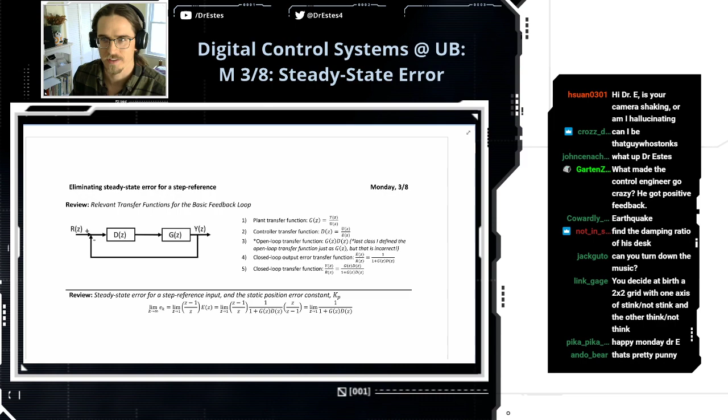Our digital controls channel is starting to develop some lore, some history. Hey, happy Monday, Pika.

All right, let's get started here. So we are going to revisit this DC motor, and we are going to make an improved controller. But we're going to walk through conceptually how we get to this point.

Happy Monday to all that do not stink. Okay, all right, where... I'm going to the wrong screen. Okay, so that's where we're going today.

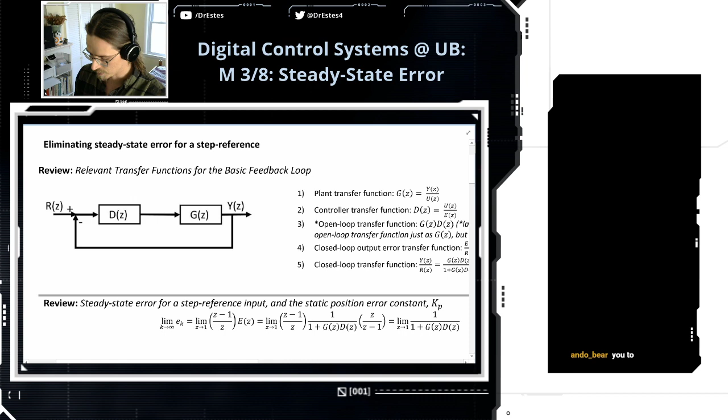Just a quick recap on what we did last time, because that was Friday, and it was a long time ago. We're introducing some basic feedback notation, so we're going to refer to this block, this transfer function G, as the plant. This is the system that we want to control. In this case, this is the DC motor.

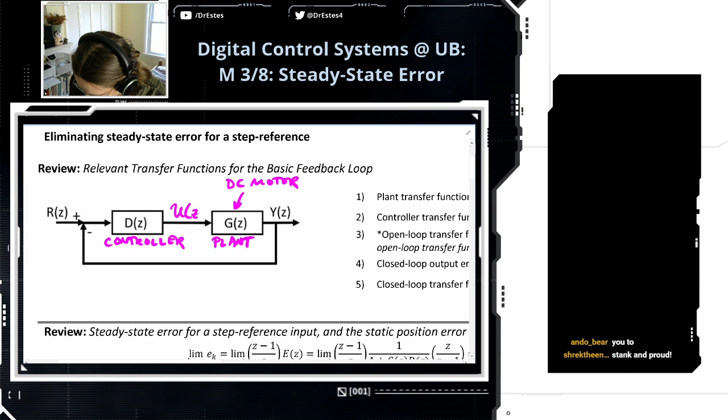D of Z is the controller. And what this amounts to, and you'll see this today, this amounts to one line of code on your microcontroller that tells us what voltage to provide to the DC motor. The signal that comes out of the controller, we typically call it U. For the DC motor, this is a voltage. And the input to the controller is the error, E.

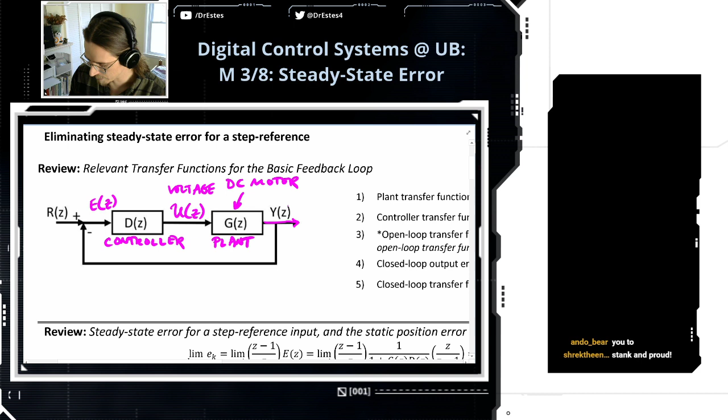And so here's where we have our feedback loop. The error is the difference between the output, and this output for our DC motor is an angular velocity, in radians per second in our case. And here is our reference angular velocity, the desired angular velocity that we want to achieve. So the error is R minus Y. The controller takes the error and it spits out a voltage which is provided to the plant. And the goal is, as with any control system, we want to closely follow the reference behavior.

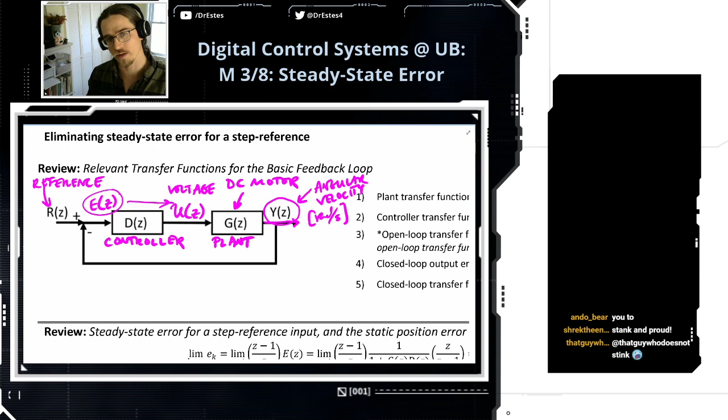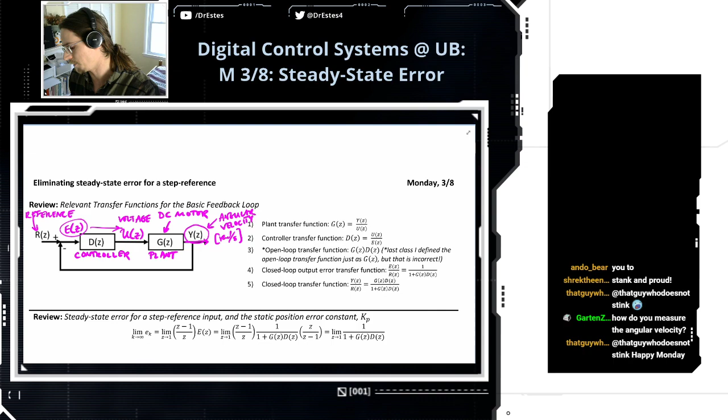So last time, we derived a bunch of transfer functions. How do you measure the angular velocity? There's a rotary encoder on here, and it's just picking up the angular position. And then I'm doing a real simple differentiation to approximate the angular velocity, so we're not using back EMF or anything like that. It's kind of a crude estimate of the angular velocity.

So our plant transfer function G of Z, this is the Z transform of the output of your plant, which is angular velocity, over the input, which is the voltage. Our controller transfer function is the ratio of the Z transform of our control input to our error signal.

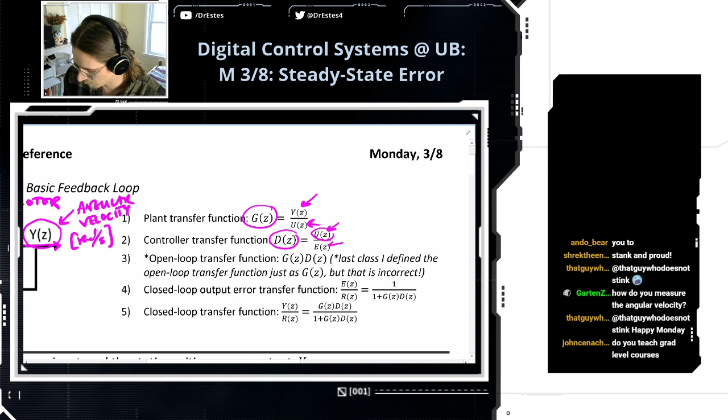Now, I put a star next to this guy. The open loop transfer function, I don't think we talked too much about this, but it's the product of G and D. So if you take your controller transfer function and you multiply it with the transfer function for the plant, that's your open loop transfer function. Because I think last class I defined the open loop transfer function just as the plant, but that's not correct.

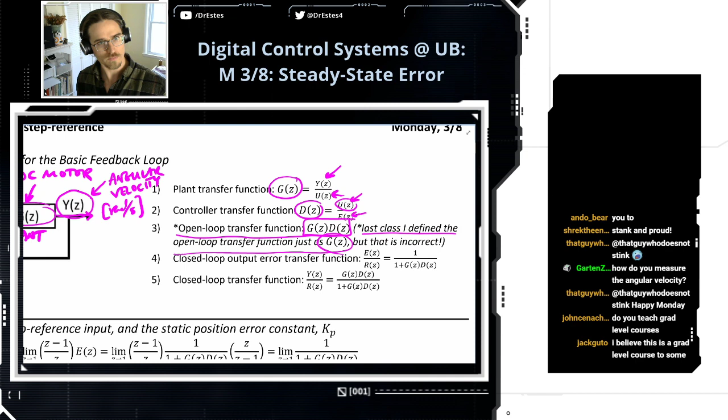John Cena says, do you teach grad level courses? Yes, well, this is a mixture of senior level students and graduate students. I think we have mechanical engineers, electrical engineers, some computer science, mostly mechanical.

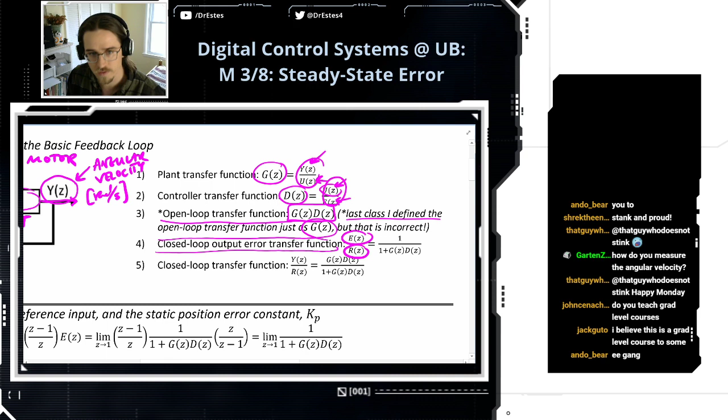Okay, the closed loop output error transfer function. So all of these transfer functions are just ratios of two quantities to each other, basically. So we have the error to the reference, that's the error transfer function.

Yeah, represent electrical engineering, aerospace engineering. And MAE for life.

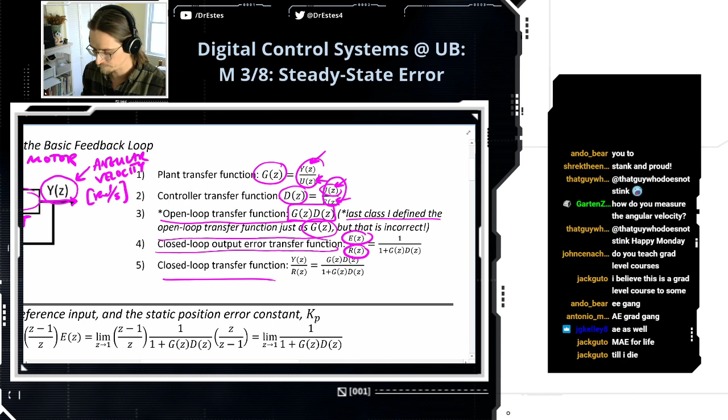All right, and then last but not least, the closed loop transfer function, and this is the most critical one. What is the difference between the closed loop and the open loop? Let me tell you the difference.

So, open loop transfer function. As the name implies, we're going to open up this feedback loop. It's going to be the ratio of Y of Z to R of Z, but you're going to assume that you take a pair of scissors and you chop this, and there's no feedback going back. So the reference signal just goes through like this, and it never has a chance to come back. So no feedback.

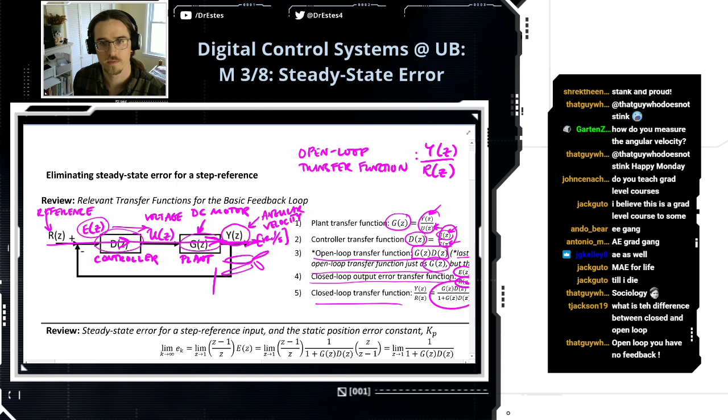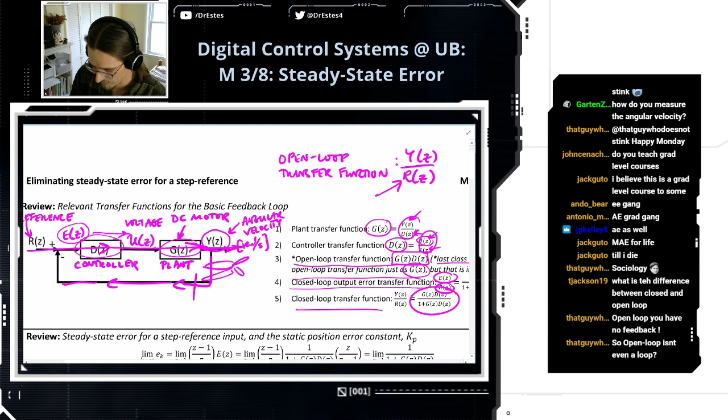The closed loop transfer function is this same ratio, but we have this feedback loop intact. So open loop isn't even a loop. I know that might blow your mind, but that is the case. We've opened the loop, and so it's no longer really a loop, I guess.

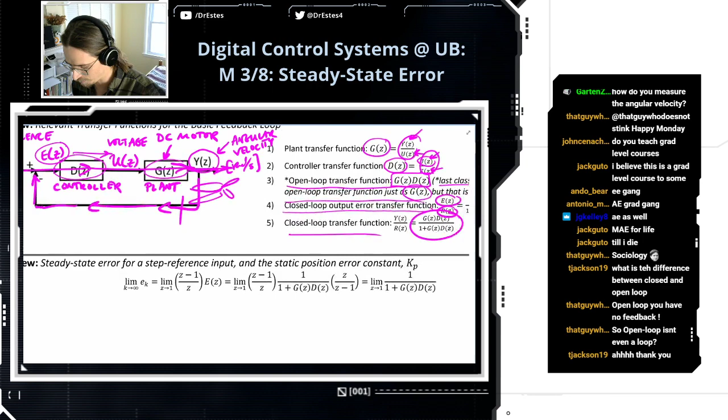Okay, so that's just refreshing on this basic block diagram picture and some of the transfer functions that we're going to need to reference over and over again. Now, today our goal is to deal with steady state error. Maybe actually we should demonstrate the controller that we made last time so that you can see that it has some issues.

It has some issues. Let's open this up. An open loop in general isn't a loop—only closed loops are.

All right, here we're running this controller on Arduino. I don't want to get bogged down too much, but this is a digital controller where we specify a time step, or what we've been calling the sampling period. So 0.05 seconds elapse between measurements of angular velocity, meaning we're reading the angular velocity 20 times a second, and we're also sending commands to the motor 20 times a second.

We have this desired angular velocity, which is 1.5 times 2 pi radians per second—so that's 1.5 revolutions per second. That's what we want to do, and we're updating 20 times a second.

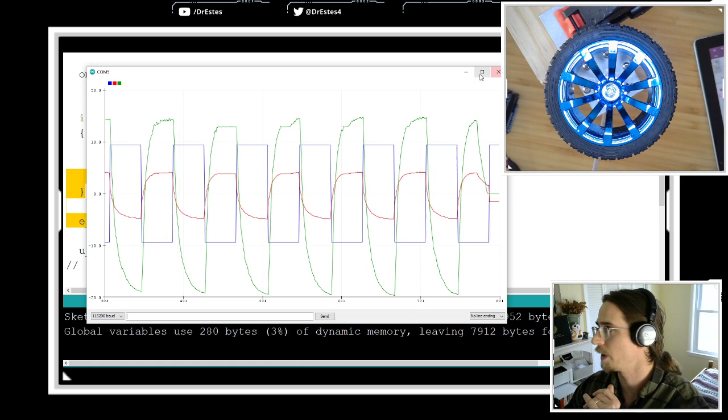Let's just see—I think this is what we did. We augmented the reference a little bit. We said, okay, if it's going to go reverse of the reference, why don't we just reverse the reference in advance, so the controller follows something else and we trick it into doing the right thing, if that makes any sense. So we upload this.

This is all stuff that we did last time. Let's see if this works. So it calmed down.

Okay, so now we at least got it kind of in phase—the green is following the blue. But there's still this steady state error, and there's kind of this asymmetrical behavior. So this was like a quick and dirty fix, and it doesn't really work that well. All right, so our goal today is to make this green line match the blue line in both directions.

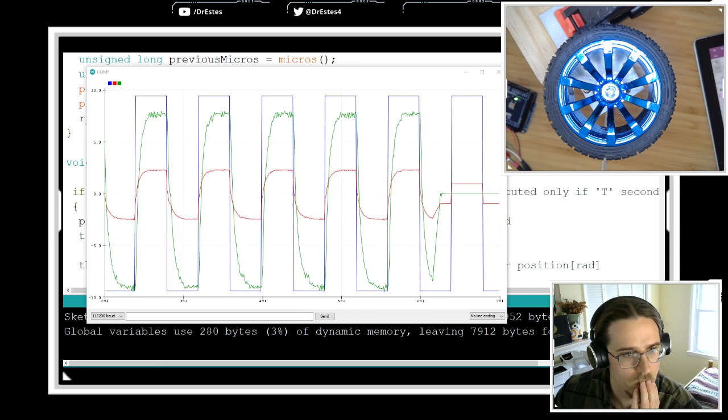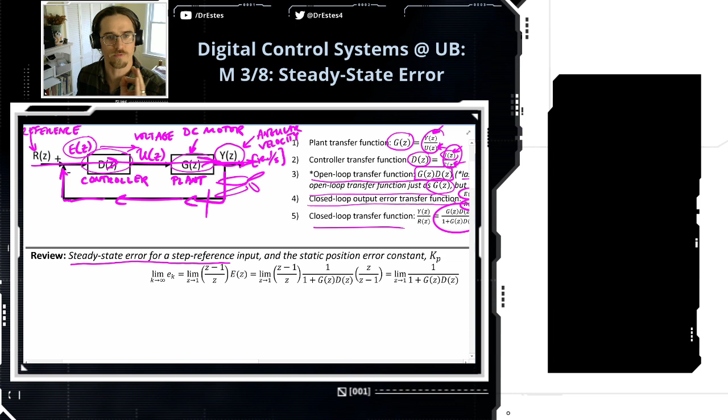All right, unplugging that—we're coming back this way. So we can quantify this steady state error, and we derived the final value theorem to help us make this calculation.

So look at this—this is saying the limit of the error as time marches forward is equal to this. Now this right here is just the final value theorem. It connects some quantity in the real life domain, the error as time goes on, to this quantity in the z domain, which is kind of weird. But these two are equal to each other, and doing this math in the z domain is actually easier than doing it in the physical domain. That's why we go to the z domain in the first place.

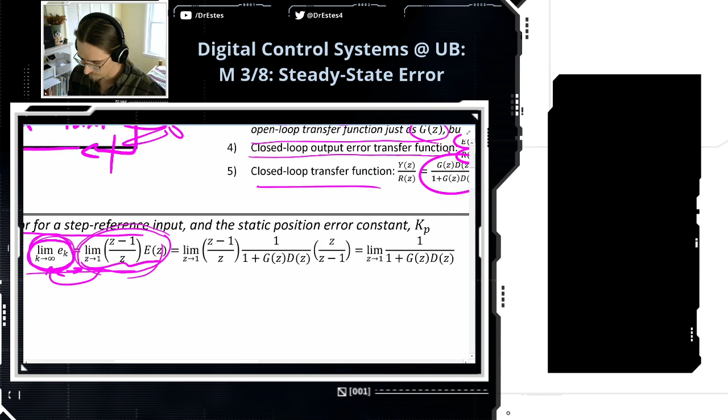But if you look at this, if you work out the math—okay, so we have this z minus 1 over z term. E of z, the error in the z domain, is equal to the combination of these two terms.

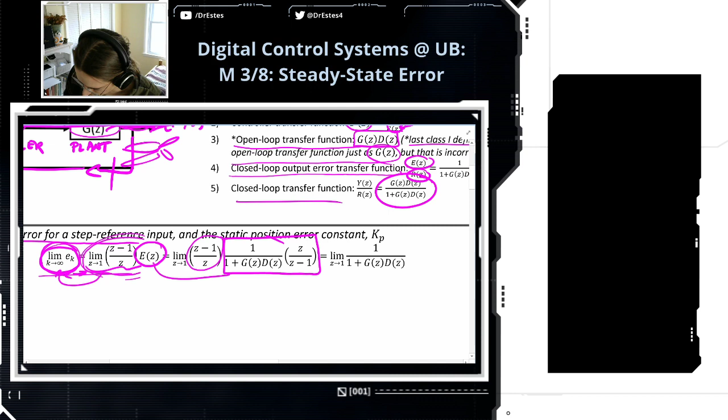Let me tell you why. This right here is one of the transfer functions that we derived up above—in fact, it's number 4, the closed loop output error transfer function. So this is the ratio E of z over R of z, the closed loop output error transfer function. And then this, z over z minus 1, is the z transform of a step reference, a unit step reference.

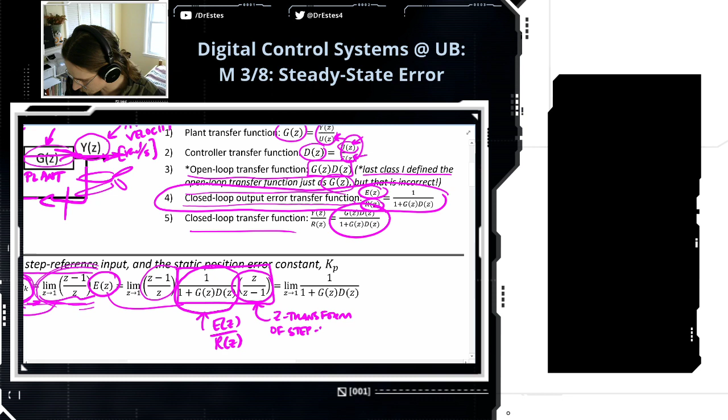So this is Z transform of a step reference, which is the type of reference that we're sending to the DC motor right now—it's just a step up and a step down. So that's why we're using this function. This is R of z in the case where you're using a step reference.

So if you have E of z divided by R of z and you multiply it by R of z, you're just going to be left with E of z because the R of z's will cancel. So this combination of terms is E of z.

And notice this: z minus 1 over z cancels with z over z minus 1. So finding the limit of the error turns out to be as simple as just getting the limit as z approaches 1 of this one term that remained.

So I want to introduce a little bit more terminology—I covered this up, I realize. I want to introduce the static position error constant. We call it Kp. So this is the error when you apply a step reference to a control system. You can rewrite this as, by definition—so this triangle on top of the equal sign means by definition—we're going to write this as 1 over 1 plus Kp.

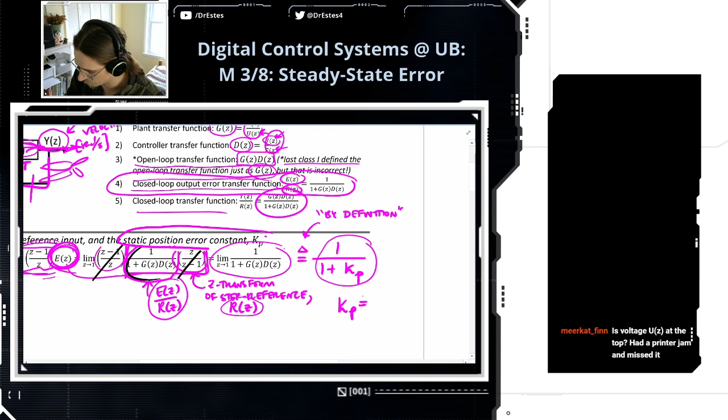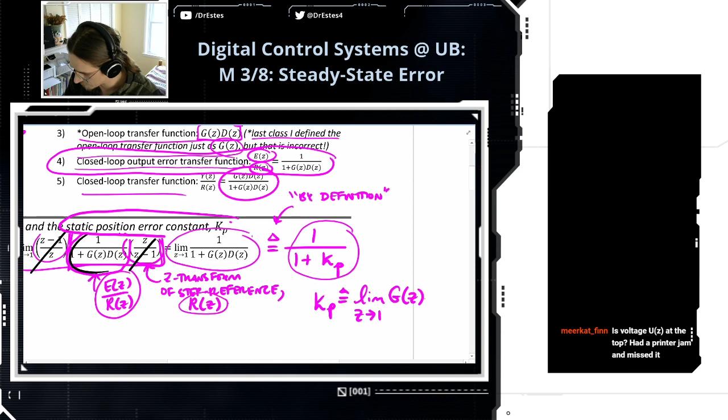Okay, so if you relate this term right here to this, you're going to see that we have defined the static position error constant to be—using this triangle again—defined as the limit as z approaches 1 of the product of G of z and D of z. And as we just defined up above, this product is called the open loop transfer function.

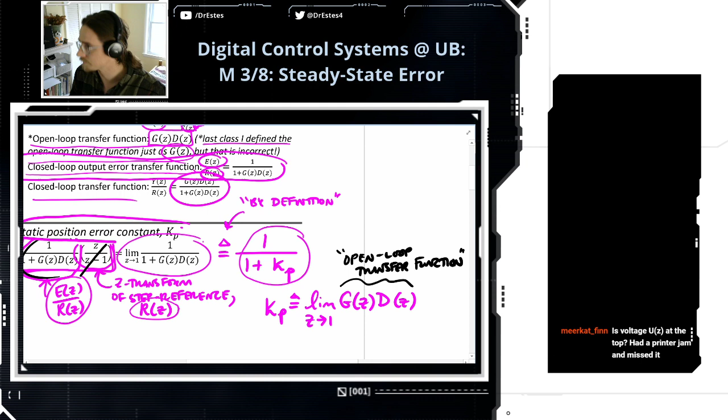Oops, just dropped my pen. Okay.

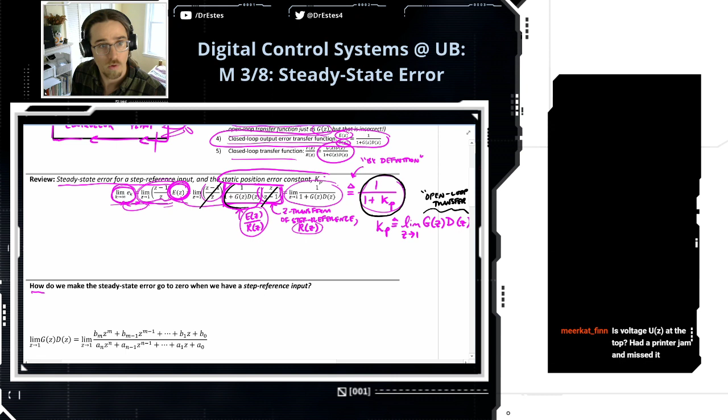So when we apply a step reference to our control system, this is what the error is going to be—the difference between where we want to go and where we actually are. So the question is, how do we make the steady state error go to 0 when we have a step reference?

So the question I want to ask you is, if I want this error term to go to 0, what value do I need Kp to be? This is your first challenge for the day. Infinite—yes, you want Kp to be as big as you possibly can.

So the answer is make Kp equal infinity. And what is Kp? It's the limit as z approaches 1 of the product of g and d, which is your open loop transfer function. So I want this limit as z approaches 1 to be infinity. Or negative infinity. Don't even go there with me right now.

Okay, now let's think about this physically for a second. If I want to drive this quantity to infinity, g of z is our plant—it's the system that we're controlling. And you can't change this.

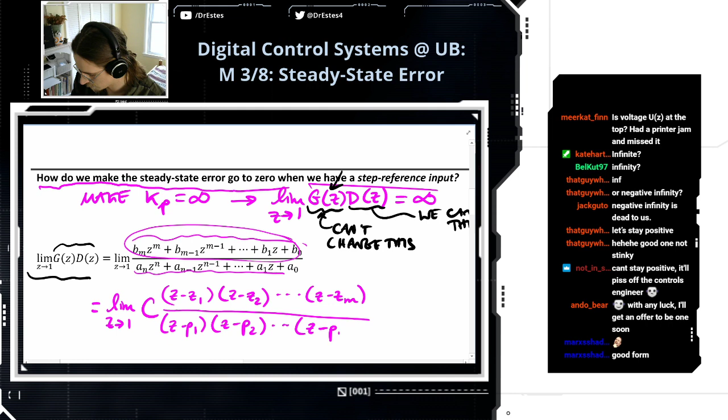So if you can find a value of z that makes the numerator polynomial go to 0, then that's a zero of the function. And then if we factor the denominator into its roots, we have the poles, because the poles are the values of z that make this transfer function go to infinity. So we're going to say we have m zeros, n poles here.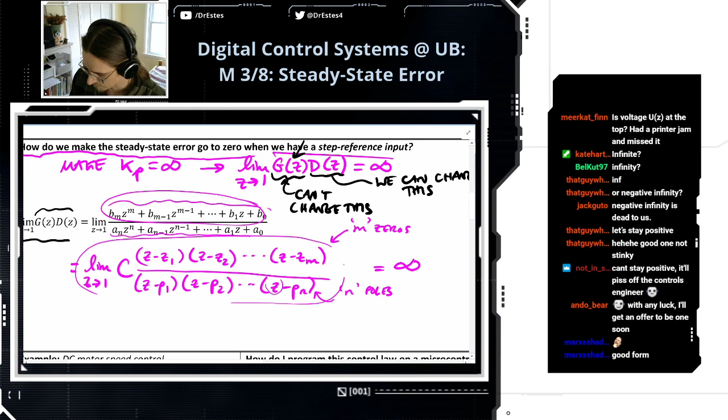And if we take the limit as z approaches 1, if we want to have 0 steady state error, this limit needs to go to infinity. So let me ask you this: how is it possible for this limit to go to infinity? Can you think of a way that that could possibly happen? What are the conditions in the case where this ratio of polynomials would be infinite?

Okay, add a pole—more poles than zeros. Poles go to 0. Okay, we're very close. This is going to be infinite if the denominator evaluates to 0.

If the denominator evaluates to 0, that's guaranteed. If zi equals pi and c equals... no, you can't have that—we're not going to make c infinite. And remember, we're taking the limit as z goes to 1, so z is going to be evaluated at 1. Okay, so first thing...

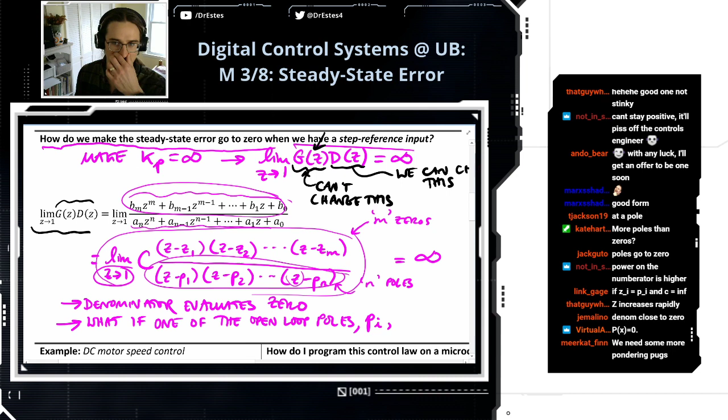We want the denominator to evaluate to 0. Now consider this case: what if one of the open loop poles, which are pi—so one of these, maybe number 1, 2, or 3, just any one of those poles—if one of those open loop poles equals 1, so like what if P1 was equal to 1 or something? Then if I take the limit of this as z goes to 1, if I plug a 1 in there, I'm going to have 1 minus 1. I'm going to have a 0 here, and it's going to cancel out the denominator.

We need some more pondering pugs. We'll put one right here. And this is kind of just like a loaf pug. Okay.

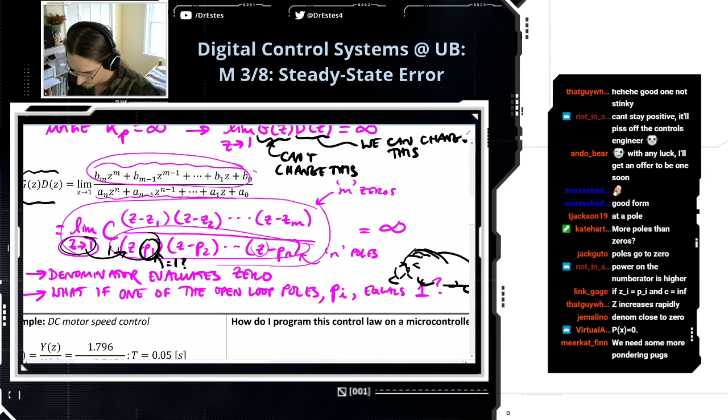So if one of those open loop poles is at 1, then the limit as z approaches 1 goes to infinity.

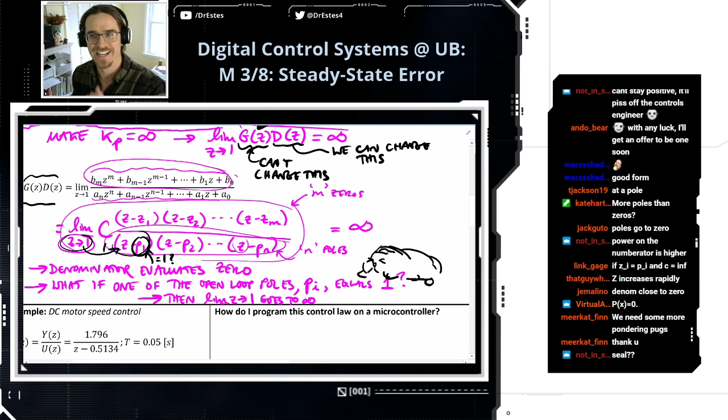Is that a seal? Might as well be. That's a loaf pug. Nightmare? That's not nightmare fuel. That's cute. That's adorable.

Okay, so we're going to put a statement over here with a star: here's a way to get this limit to go to infinity, which makes Kp equal to infinity, which makes your steady state error 0. Even the pug is overburdened during midterm week. I know.

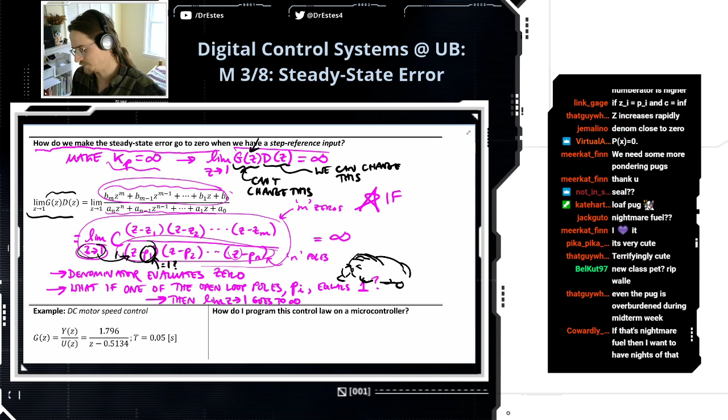Okay, so if we have an open loop pole at z equals +1, we will have 0 steady state error for a step reference.

Antonio says, end my suffering. Midterm week kills. Yeah. I hear you guys, I know midterm week is stressful. I know it's stressful. Hang in there, hang in there. Okay.

Let's talk about the DC motor then. Nine weeks left until PowerPoint graduation. Hey, we're over a third of the way through.

This is the model we came up with for our DC motor. This is considering a sampling period of 0.05 seconds, 20 samples per second, all right?

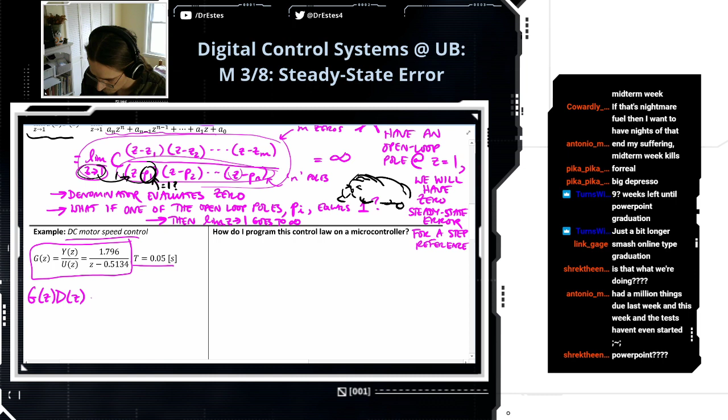Now, the open loop transfer function, g of z times d of z, is going to be 1.796—so this is just g of z. And then we're going to multiply this by our controller. Now, when we had a proportional controller, d of z was just equal to a control gain, k, all right?

So, in order for our system to have 0 steady state error, this open loop transfer function needs to have a pole at z equals +1. A very easy way to do this, instead of just having d of z equal to k, why don't we add a pole at z equals +1? If we do this, we'll meet this condition up above, and we should have 0 steady state error. So what I'm proposing, for now, is we just do this: open loop pole at z equals 1 should eliminate steady state error.

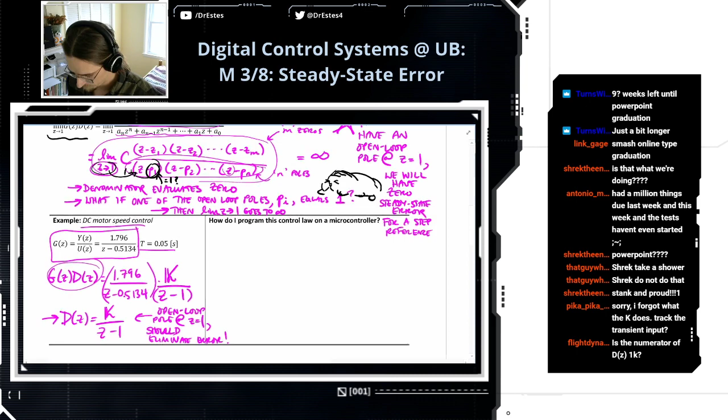Sorry, I forgot what the K does—let me tell you what K was. When we did a proportional controller, that just means d of z is equal to K. So the error comes in, and then the controller just multiplies the error by some proportionality constant, and the voltage is just going to be the gain times E.

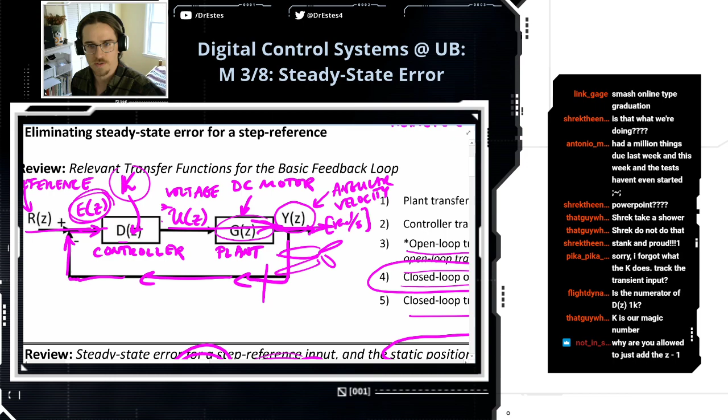Why are you allowed to just add the z minus 1? This is the beautiful thing about controls—remember, the controller is just something we're going to be implementing in a line of code, and I can make it whatever I want it to be. There's going to be limits, you'll see, but this is a beautiful thing: I know that I need an open loop pole at z equals 1, so I can just add one there to my controller. Because a controller is an abstract thing that we implement in code, and it can just be whatever.

So to get into your question about how I would program this control law on a microcontroller, let me make this more concrete. D of z, the transfer function for my controller, is equal to this. What does the transfer function of the controller mean? It's the ratio of the z transform of the control input, which is a voltage, divided by the z transform of the error. Now I'm going to multiply this out.

I'm going to multiply both sides by z minus 1. So u of z times z minus 1 is going to be equal to k times e of z. I'm just taking this expression above and multiplying both sides by z minus 1. Let's expand this out. I promise this is going somewhere. So we're going to have z times u of z minus u of z, equal to k times e of z.

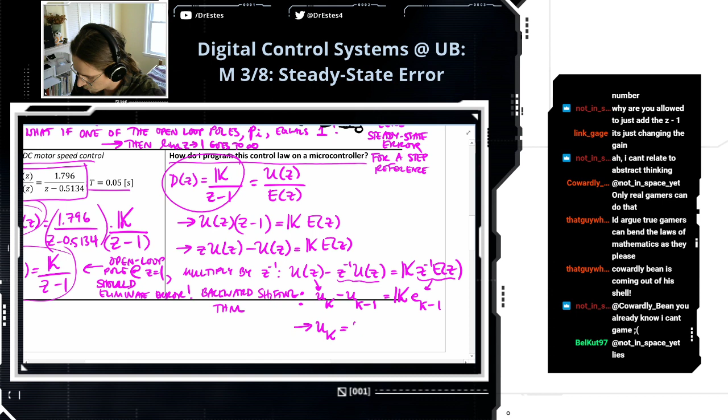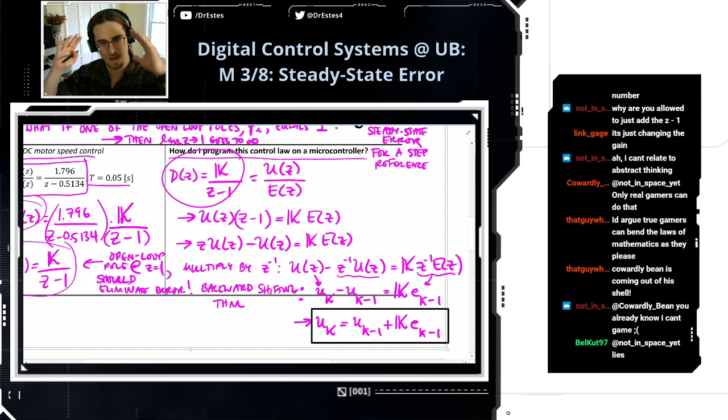Now this is where it becomes concrete. To implement this control law on an Arduino, it comes down to the line of code where I define the control input at some step k. It's going to equal whatever control input I used at the prior step, plus some gain times the error from the prior step. I'll put a box around this. It might take time to wrap your head around, but this development shows that this difference equation is the same as implementing this transfer function controller. And all of this accounts for how the error was asymmetrical as well. It's a beautiful thing.

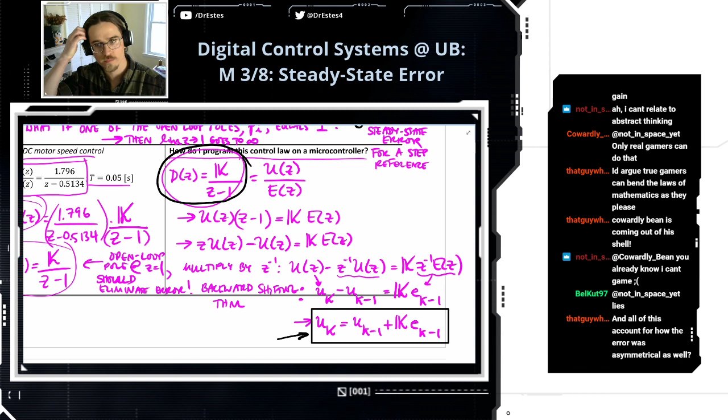Okay, but the work isn't done yet, because when I actually program this in the Arduino, I have to choose some value for that control gain. And that's where the real work comes in.

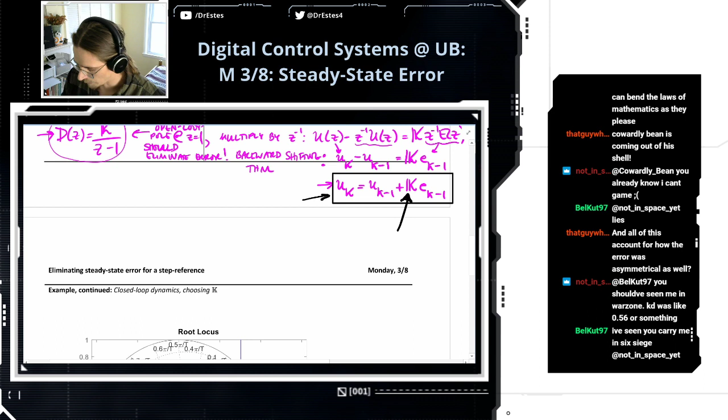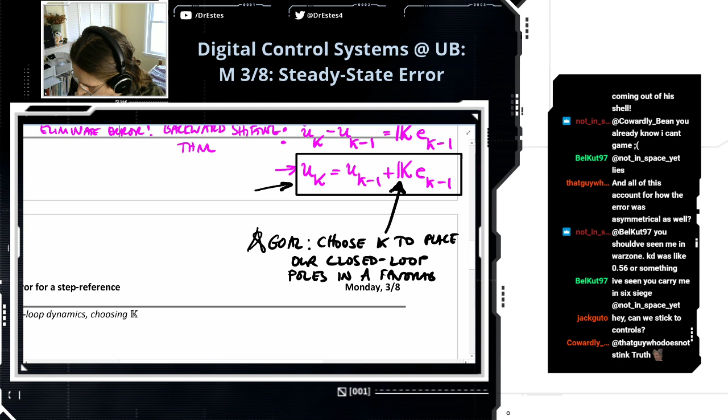Okay, so let's state our goal here. This is our goal when choosing K: choose K to place our closed loop poles in a favorable location.

After our first exam, we're going to use the root locus method to place our closed loop poles anywhere we want, and we'll work on that. But for right now, with this structure of a controller, we're not going to have complete control over where we place those poles.

Let me just keep explaining this a little bit. The closed loop poles, this is going to be how our system behaves once we place the feedback loop on this, or implement this controller, which is the same as implementing the feedback loop.

A flight dynamics student asked: for the exam, if we're comfortable doing all the homework problems, will we be all right? Yes. Will this right here be on this week's exam? No. The exam is going to cover through homework 3. This is kind of going a step beyond that.

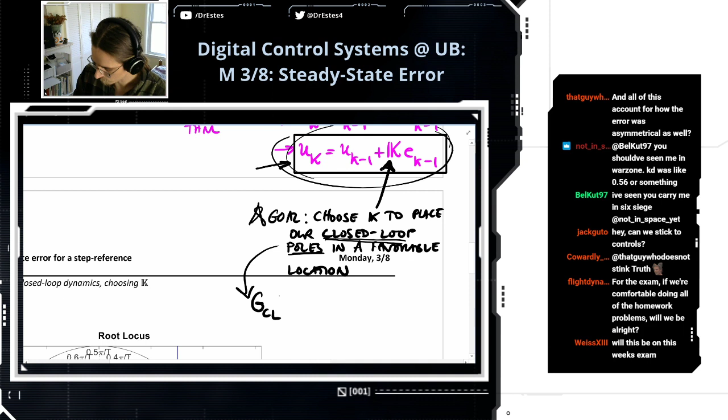Our closed loop transfer function—let's go back here really quick, I'm just going to list what it is. The poles of this are called the... wait, what does that say before location? Yeah, it says favorable. It's a little sloppy.

The poles of this transfer function, the values of z that make it go to infinity, those are the roots of the characteristic equation for the closed loop system. I know I'm using a lot of jargon here, but that's how the system is going to behave with this controller in place.

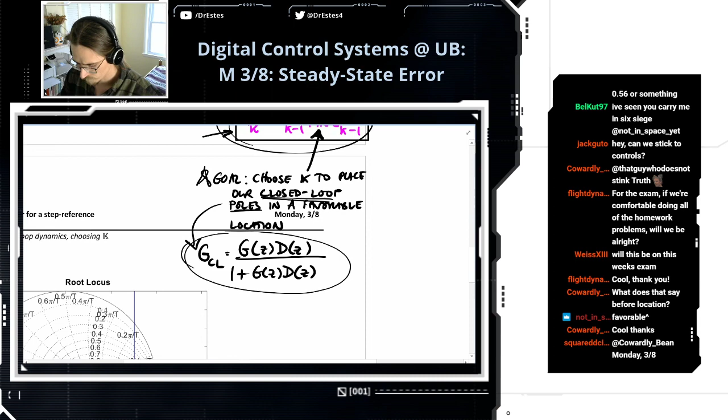A really nice way to visualize where the roots can be is using the root locus method. Right now I'm not going to get too much into details. In this class, we're just going to use built-in tools in Matlab to generate the root locus. I know when you take dynamic systems, you talk about the specific rules and asymptotic approximations to sketch this thing by hand, but we're not going to be doing that here. We're going to use built-in tools to build the root locus.

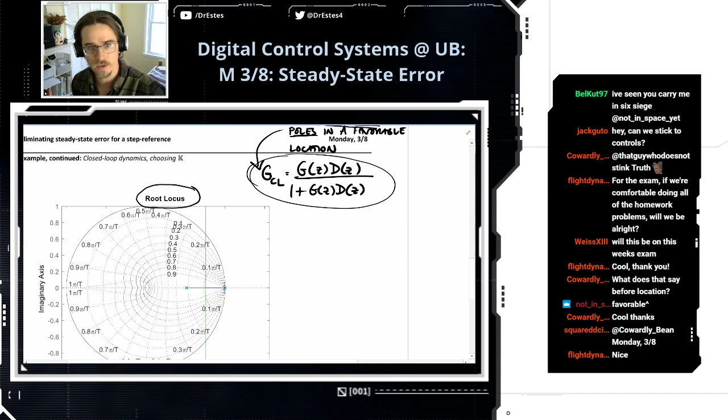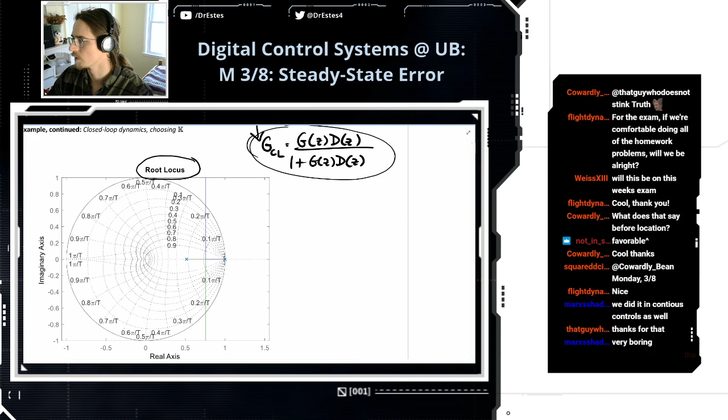So what I want to show you is how we make this. Let's go to Matlab really quick and we're going to bang this out.

So we have this sampling period for our system. I'm going to make our transfer function for our plant. In Matlab, you just use the tf command, and you put the numerator over here, followed by the denominator. For digital control systems, you have this third argument, which specifies the sampling period that this transfer function corresponds to. For a continuous time system you don't have to worry about this, and it isn't super critical to include when you're doing the root locus, since it won't change that, but it's a good habit to include this term for what we're doing in this class. So the numerator was just a scalar, 1.796, and the denominator was z minus 0.5134.

And then our transfer function D, first I'm going to do it this way, and then I'm going to fix something. So it's going to have numerator, denominator, and then our sampling period T. The controller we're trying out has the gain K in the numerator, and the bottom is z minus 1.

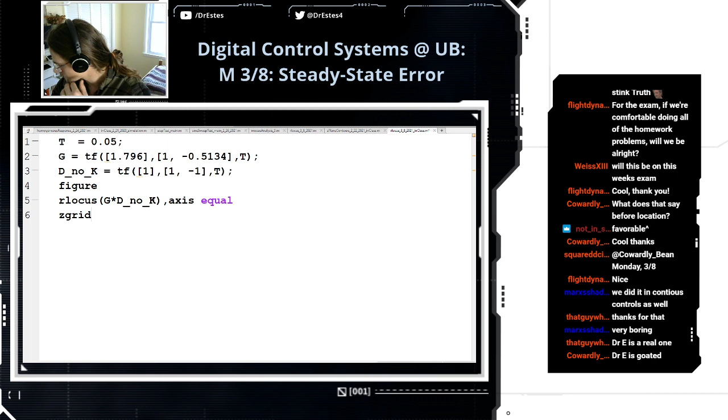Then you can make a figure and just use the rlocus command, putting in your open loop transfer function. The open loop transfer function is the product of G and D, but once again we're ignoring that K value here. I like to make the axes equal, and we'll even turn on the Z grid. This makes a root locus plot. So let's run this.

It's thinking, okay, and then it generated this. I'm going to blow this up a little bit. Actually, let's just go back to the surface because, wait, where'd you go? Wait, where's my OneNote?

Why don't we need to use the dot multiplication? I think I closed OneNote. Because you only need to use the dot multiplication when you're doing element-wise multiplication of vectors, and these aren't vectors, they're just transfer functions.

Hello? Okay, it's back. This is the root locus plot we made.

Good grief, Charlie Brown! It is time to pack up. Okay, okay, it's 1:30. Let me take 5 more minutes.

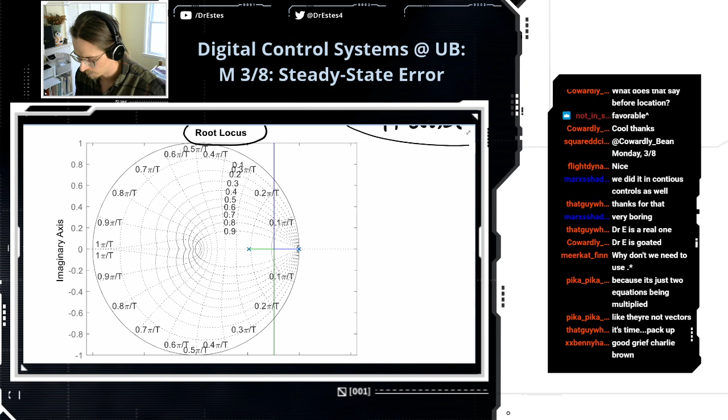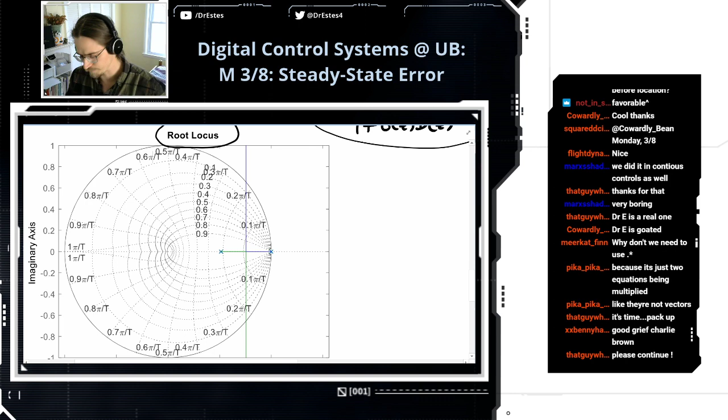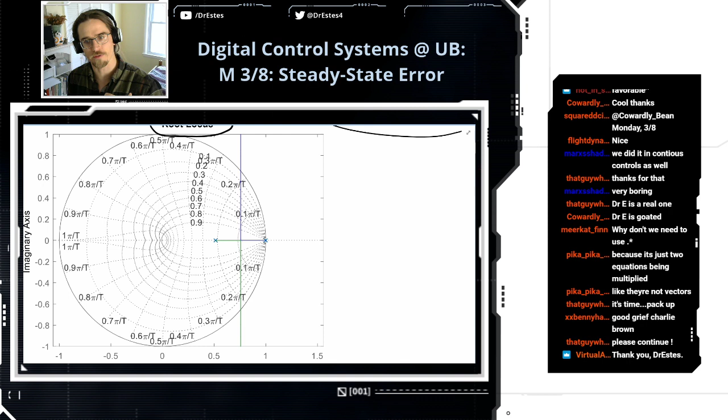I went longer than I intended, but okay, what you're looking at here are the possible root locations for our closed loop system. Notice there's two roots. Our DC motor was a first order system, but when we added this new controller, the closed loop system became second order, so you actually see two roots.

When you use the root locus command, you see these X's here. Where you see those, this is where K equals 0. So if you were to set your control gain equal to 0, my closed loop poles would be here, and this would actually be a very poor choice because this root here is just at the stability boundary, and our system will never actually settle.

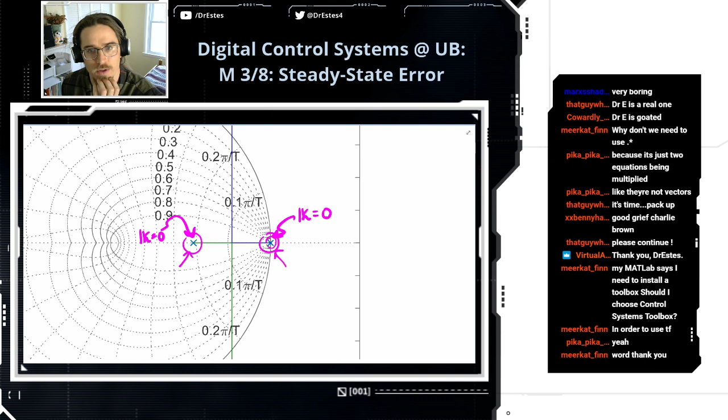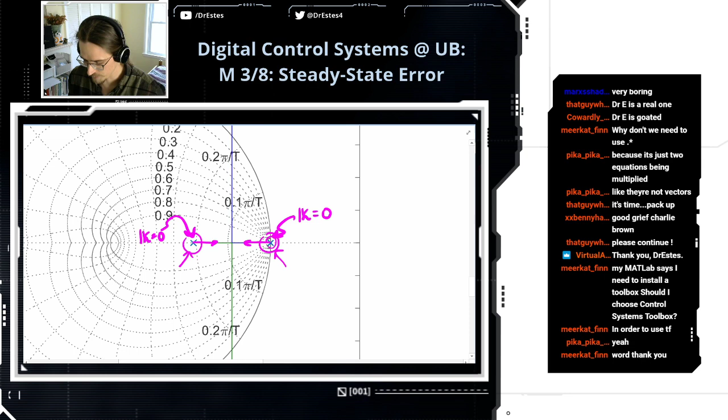Because we know that roots out here never actually stabilize, so anyways, only positive values of K will be used by this algorithm. As you increase K, these roots move. Like this one, they move towards here, and then they reach this breakaway point at some value of K.

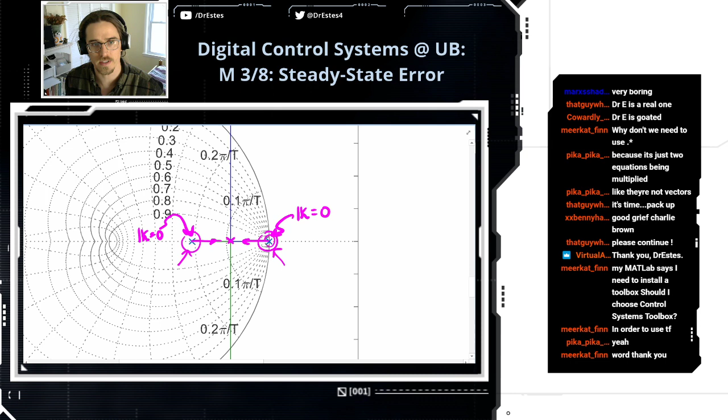Actually, we could check that. If you click on here, right at that intersection, you probably can't see this, but the gain where that happens, which is the value of K, it happens at 0.033. So let's go back here.

This is where k equals 0.033. Pretty interesting how the real component stays constant after the roots leave the real axis.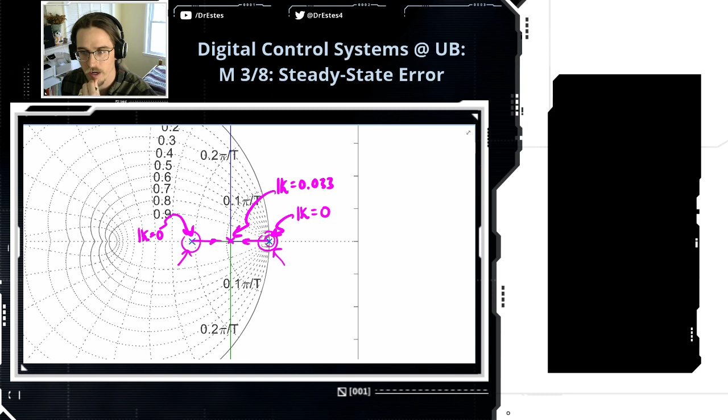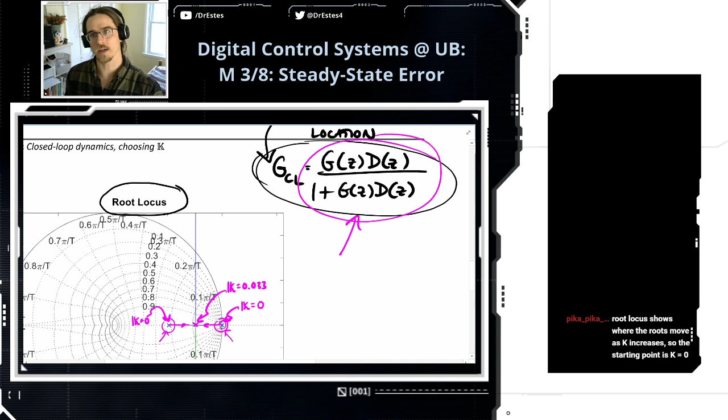Wait, why are k equals 0 there again? Well, they just are. If you plug k equals 0 into this transfer function, it's finding the values of z that make this go to infinity. So if you plug k equals 0 in for your controller, these two roots just happen to be where the roots are.

All right, and then you're increasing k, and notice this. Once you increase k beyond a certain point, we leave the stability boundary. Where does that happen? The controller is going to become unstable, and we won't test it out because I don't really want to break it. 0.274.

So to have a stable system, I already know that the gain needs to be somewhere between 0 and 0.274. Okay, because we're running out of time, we're just going to pick a gain right now. What do you want to pick? Actually, let me show you something really quick. We're going to pick a gain, upload it really quick, and then show you, and then we're going to be done.

Let's keep it real. Something in between 0.033 and 0. Okay, 0.174. Let's do... 0.0, I like 0.033. We're going to keep it real. And this is actually going to achieve the fastest possible settling time for our system. All right, let's go.

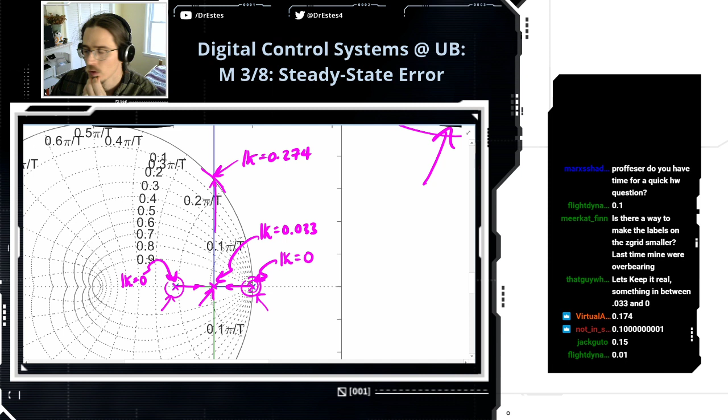We got to open up the Arduino code. So, okay, we got to comment this out. Watch this, this is going to be really straightforward. Zoom in a little bit more. This is what our controller was before. It was just a gain times the error. So I already had this ready in advance.

We're going to make this modification. So now the voltage that we send is, remember this is the difference equation we wrote out earlier, going to be equal to the previous voltage that we sent plus the gain times the error at the previous time. So we got to change this gain k to 0.033.

Before we had this. So we're going to do that. Let's upload it. Okay, I need to... Oops. Okay, let's go to the plotter. Oh, it's beautiful.

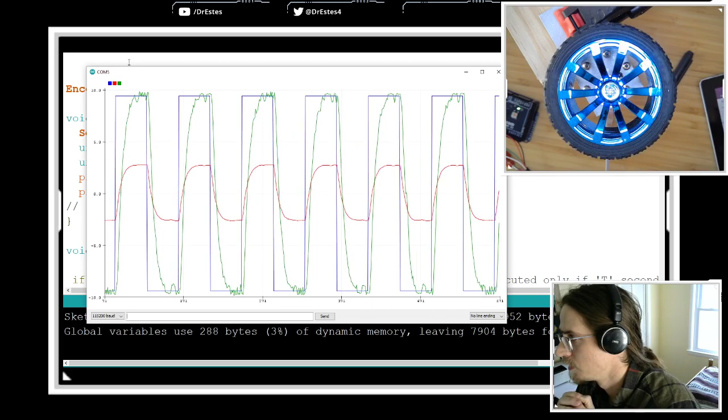And it turns out what's going on here is it looks like it settles a little differently each time. I think it does. Wait, let's try a couple different gains.

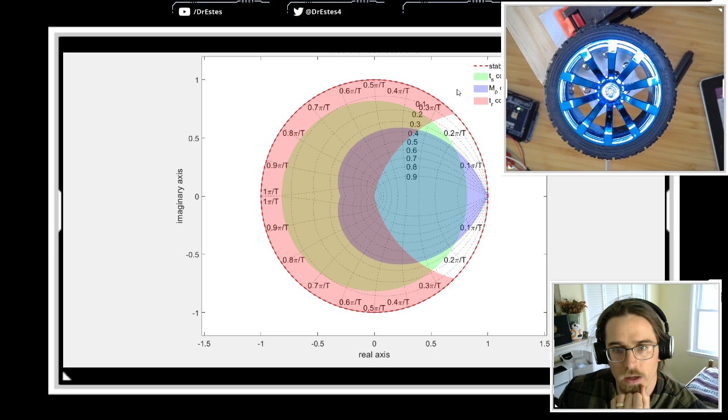Now, shoot, we didn't have too much time to look at this, but if you remember this code that we made, what you can do is you can overlay the root locus on this. And if you do that, maybe we'll play with this a little bit next time. But remember, these contours that we make, I'm going to unplug this for a second, these contours that we make are related to different behavior, like overshoot, settling time, rise time.

So you can pick where you place your poles based on these contours. Earlier I was playing with this and I found one that had an overshoot of like 30% or something. Yeah, let's go back here. I can't remember which one it was. I think it was like this one. I think this has an overshoot of 30% and settles in 1 second. So we're going to upload this.

And you'll just see that this has different behavior. So now, the roots of the closed loop system are complex. And if you have complex conjugate roots, you have oscillations. So this has 30% overshoot, but notice the steady state error is still 0 on both sides, because we preserved the property that there's an open loop pole at z equals 1.

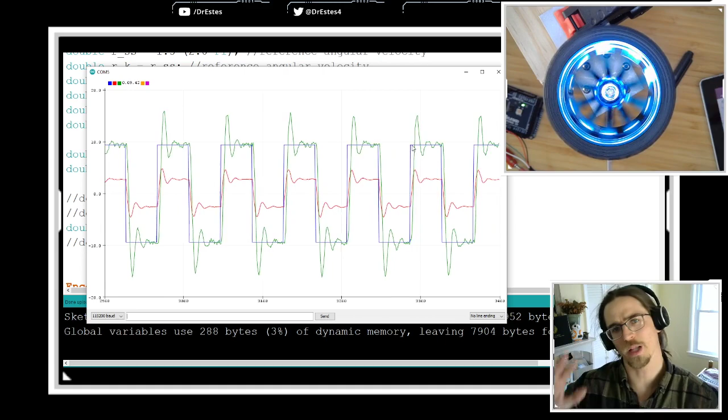Man, there's so much to play with here and unpack. We'll come back to this on Wednesday, because there's a little more we could do and play around with. I think your first project for this course is going to be making your own controller for this motor. I'm going to give you some performance constraints that you have to satisfy, and we'll have more sophisticated controllers that we can make, you'll see. Then we'll test out the controllers that you make. You'll make better controllers than this.

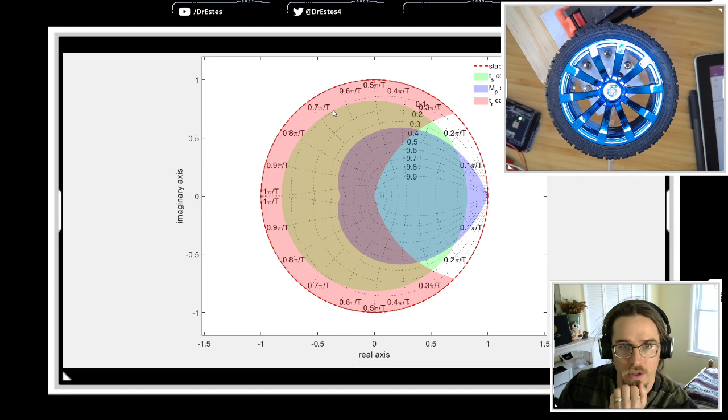Till now, we were finding the discrete time roots using a specific settling time, but in the current homework, it's a range of settling time. How should we approach that? Well, actually in class we did talk about achieving a range of settling times. We spent a class period making code that fills in the range where the roots go. So if you go back to UB Learns, I posted some links to the YouTube videos where we did that, but we did the code together.

Yeah, this is fun, guys, because we're starting to get into the point of the course where, like I said, you have to build some of this knowledge first about discrete time roots and what they mean. And now we can start making controllers.

The class itself is in the ME department, but there's a mix of us taking it. That's right, it's mostly mechanical and aerospace engineers. It's getting a bit more difficult, but interesting and practical. Really enjoying the class, Dr. E. Hey, thank you.

I know we did a lot today. I know today's like drinking out of a fire hose. We're going to keep coming back and painting over this stuff over and over again, so it'll settle in gradually. So don't worry if you're watching this today and you're like, I have no clue what's going on. We'll keep reinforcing this over and over.

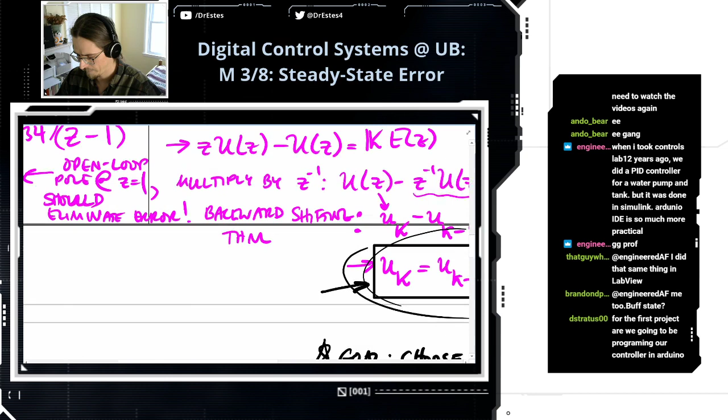For the first project, are we going to be programming our controller in Arduino? No. I'm not going to focus in this class on the specifics of Arduino programming, even though I keep forgetting I want to share this code with you. The only thing that you're going to have to give me, if we go back here, where the heck are you? You're going to have to give me a difference equation like this.

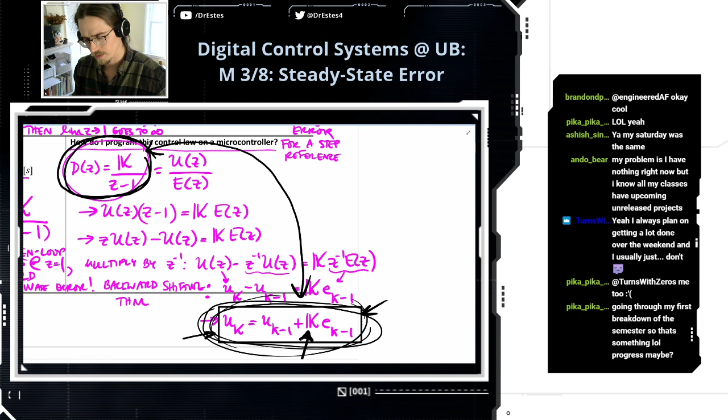Going through the first breakdown of the semester, so that's some progress maybe. Yeah, I think it's just good to know that school is very tough, and you're often in situations outside of your control where if your goal is to perform excellent and learn the best you can and get all your assignments done, it's going to put you in situations where it's just like, oh my God, there's so much I don't even know. And just knowing that it's not you, it's just the way school is. Unfortunately, it's just a semester at a time. You have to do it over and over again, but it's not like your life has to be that way ongoing.

My grandpa was an engineer, and he taught me a trick: for every 50 minutes you study or work, take a 10 or 15-minute break. It helps a lot. That sounds like excellent advice. Throwback to sophomore year when I was up till 4 a.m. doing work every day for a week. Ugh, no thanks.

Yeah, but I would say if you find yourself just totally crashing and burning, take a little break. And it doesn't hurt to reach out to your professor or something. Sometimes there's nothing that can be done, but we are all human with finite capacity, and breaks are good mentally, but I always screw myself over because I have to play catch up. Yeah, it's a tough problem. It is a tough problem. Such is life, though. Yeah.